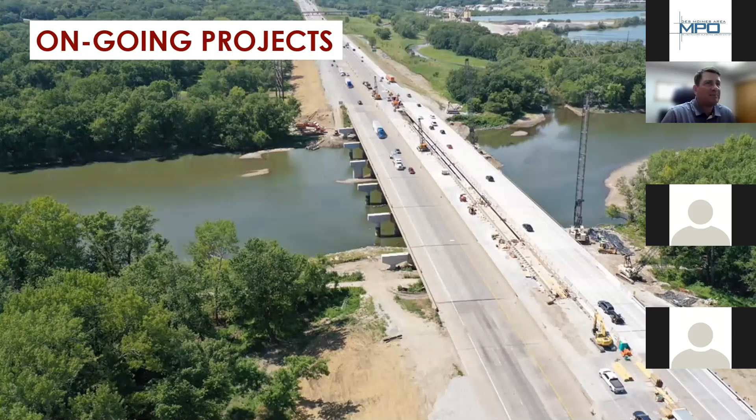So I'd like to talk about our ongoing projects. A couple of these are almost finished up, and you guys have probably been driving them for some time. But here is the Urbandale area. And as promised, we got this project done and opened end of last year. I think we're still out there finishing up a few things, but it was over a $60 million project, or about $90 million project when you include the 100th Street interchange as well. So we've, I think, greatly improved the flow out there. I haven't heard many negative comments about this at all. So I think it's working pretty good, or otherwise usually I'm the one that those comments filter to help answer.

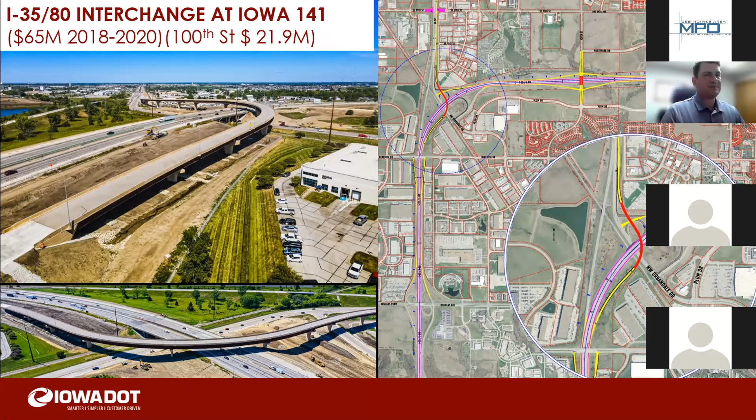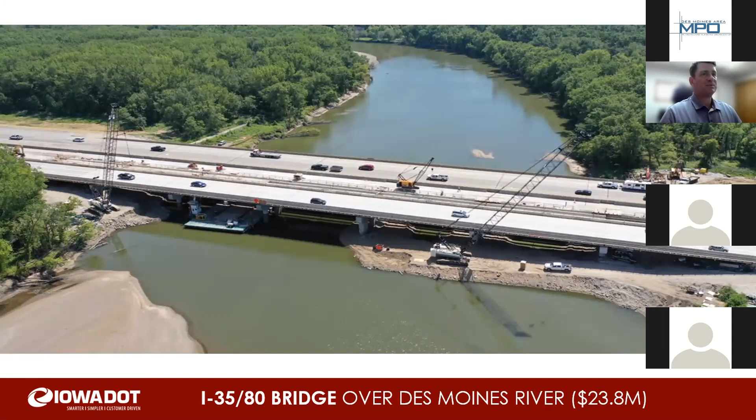So we're continuing work on the Des Moines River Bridge. The expansion of this bridge was really facilitated due to needing to repair it, and we couldn't really get it repaired safely while keeping 3 lanes of traffic open. So we ended up widening it a little bit to allow that to happen. So we're set for the future on this as well, but that should wrap up, I believe, the end of this year.

This project, First Street, I-35 in Ankeny, finished up last year. A little bit of an older picture here, but it's working pretty well out there. The only negative comment that we continue to get about this is that folks sitting at a red light don't necessarily feel comfortable or think they can turn on a red light from a one-way to a one-way.

So we've been trying to do a few social media posts and get some information out, letting people know that they can, because we don't think static signs there are gonna help a whole lot. But that's part of this improvement of flow, is that traffic can keep moving at all times through there. So if you're at a red light, waiting to turn onto a one-way, feel free to make that movement and keep traffic going.

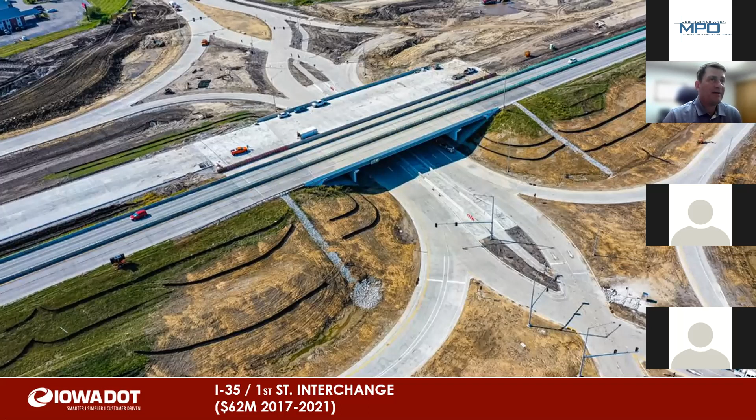And as part of this, so I back up again, but we're finishing that project up with this resurfacing here. So that will be resurfacing from south of Corporate Woods all the way to the new pavement at First Street. And hopefully this will help a little bit. We have some sound issues out in that area where we've made it a little wider and removed all of the landscaping out there. So we're going through with the new pavement and a very substantial landscaping project this year out there to help alleviate some of those concerns.

But the environmental document up front did review noise and problems. So I feel confident that we made the right choice. We just got to make sure that we have the citizens out there taken care of, because they're pretty close to the interstate in that area.

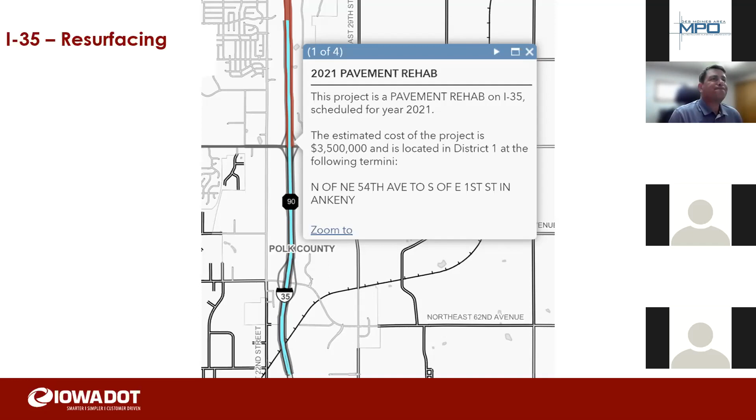This is a project just to the west of that, a few miles, that we are increasing capacity on US 69 from south city limits of Ankeny or thereabouts down to Interstate 80, 35/80. We had this project in the program 20 plus years ago. It got pulled, and took us that long to get it back in the program.

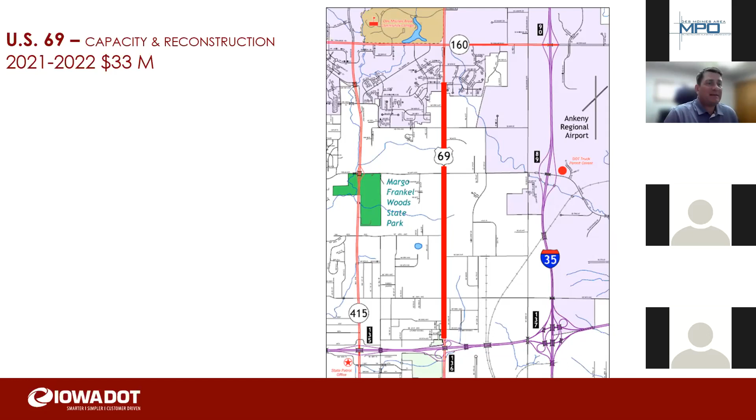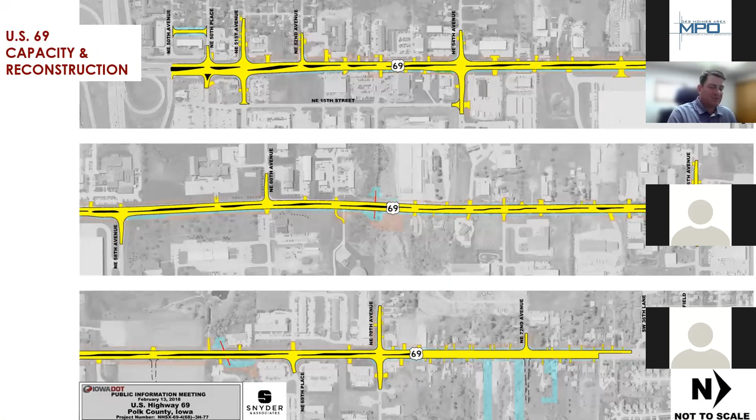But the concept here is to follow that 5-lane cross section on the north end and provide 2 through lanes and turn lanes with quite a bit of raised median in there to help with the access and control that access across there. So that's a good project. It's going on now. It's going to be going on next year. So we'll keep 2 lanes of traffic open in each direction, but there'll be some delay out there as that project continues to go.

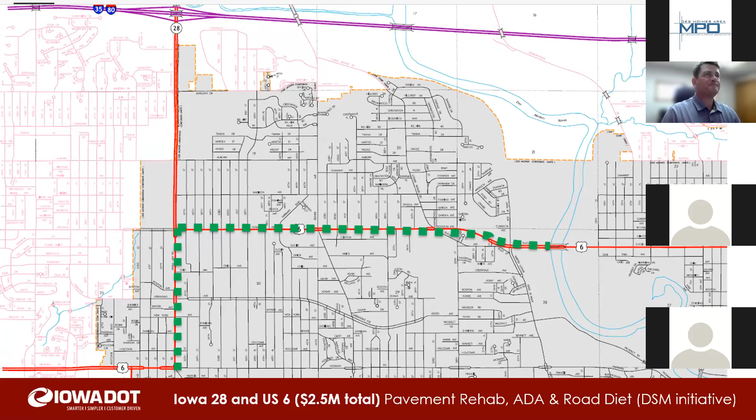We have a resurfacing project on Douglas, US 6, Iowa 28, Merle Hay Road this year. And that section on Douglas is going to be a road diet, and the city's involved with that. We've been hoping these work real well. Some areas they do, and I think it's kind of a pilot in this area, and we'll see how it goes. Those are the projects that are ongoing, that were in last year's program. I'll talk about the future projects now.

Continuing on the Northeast Mix Master, we have projects programmed there in '23 for grading and the east to north flyover bridge, and then 2027 paving, lighting, signs. So this project will take care of 2 problem movements on this interchange, one of which is the eastbound to southbound 235 ramp. It's a real short ramp, and then the Minneapolis ramp, which is a left off maneuver that's pretty old in design and definitely needs to be updated. So this is the first phase of this, kind of tackling the worst movements first.

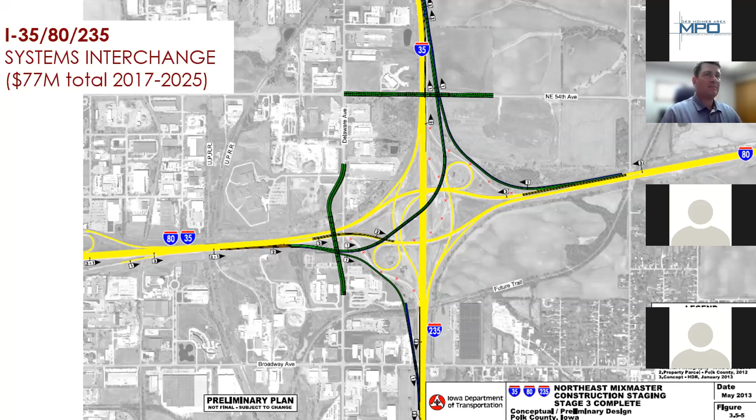And we've also had 2 phases prior to the phase that will start in '23, which were the Delaware Avenue and Northeast 54th bridges that go over, because the cross section of the new interstate ramps is going to be a lot wider, so the bridges need to be made larger. And then here's just a quick shot of the full build.

We don't have any funding beyond what I just talked about, but we have a design for the whole mix master, basically to remove all the loop ramps and create flyovers except the northbound 235 to 35/80 westbound. That movement is pretty minimal, and we thought that was the only one where the loop ramp would stay.

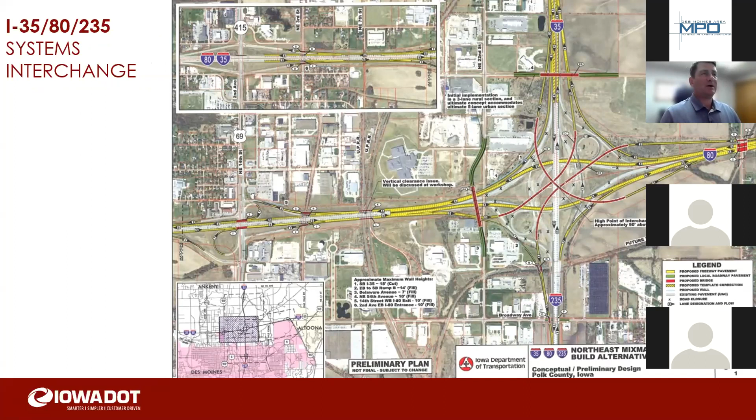Here's a project that popped up out of our integrated corridor management project that has been ongoing for a couple years, but a reoccurring bottleneck in this area was really fleshed out to the fact that this exit ramp from I-80 to southbound 65 bypass needed to be extended. So we put a project in for 2022 to pave about another 1,000 feet of that exit ramp. And as you can see, the photo on the bottom shows a big backup there.

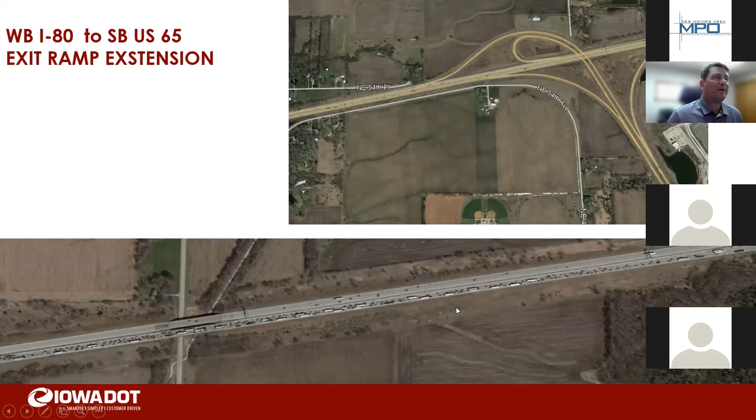This next project is helping more with this and going to add capacity in between the Mix Master and the bypass to help with that reoccurring congestion, because the extension of that ramp is just going to help kind of carry us over till we can get more capacity out here. So we have $30 million programmed in 25 and 26 for this, and those will meet in with the Northeast Mix Master, and we're coordinating those projects.

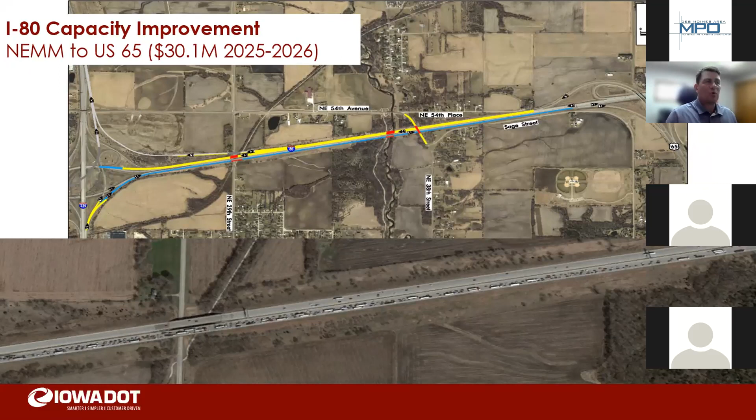We have I-35 six-laning that we have fully programmed now from 36th Street in Ankeny up just north of Iowa 210. And we have approximately $140 million programmed for that starting in 23 through 26. That's going to be a great improvement, and we're going to continue to do our best to get that improvement north of there programmed as well. But we have a lot of needs across the state, so we haven't quite made the list yet.

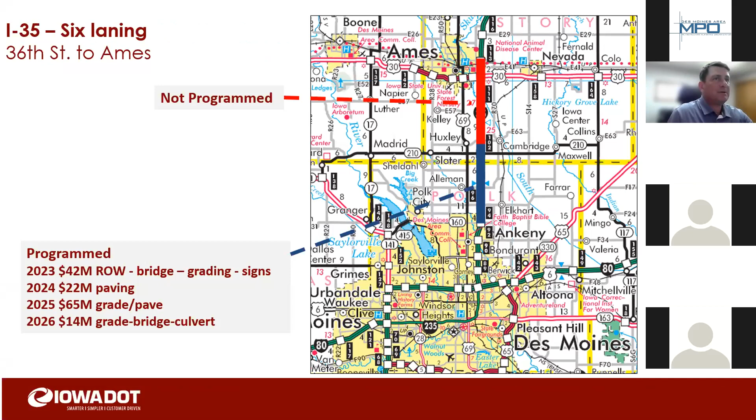Another project here that was just identified in this year's draft program was ramp metering, another project that popped up out of the integrated corridor management project / study. So we have 3.5 million programmed to start ramp metering. I'm sure this is going to be a bigger project, and I think our thought was this was going to be some kind of seed money and maybe go for a larger grant application to do some of this work.

It really showed in the integrated corridor management analysis that ramp metering would definitely help keep constant speeds on 235 as you slow folks down coming into it, especially in certain areas. So looking forward to that. We've been working through this process with the locals, really concerned to make sure that this doesn't affect local roads, and that anything that might be needed to help with any backups that might occur from this is included in the project. So we'll be working heavily with this through this process.

Then DOT has a study right now working in conjunction with the city, studying US 69 from I-80 down to the Polk County line to the south. And we have a couple projects. We have been studying this for a while. It took a little delay because our consultant budget was bad, so this consultant got put on hiatus for a year, but we're back on. We're supposed to have our first in-person public meeting on this project in September.

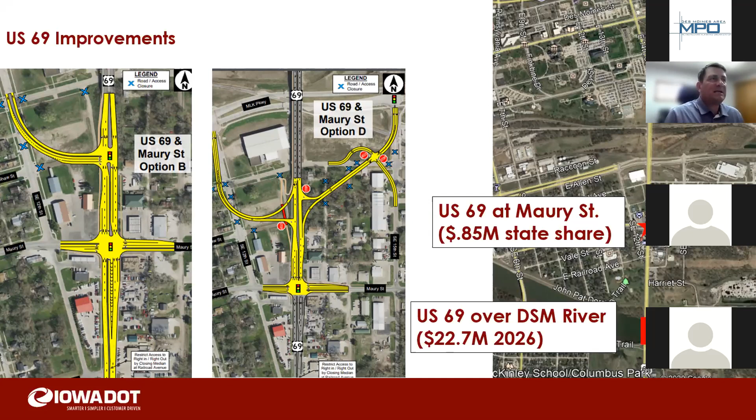And there were 4 concepts at Maury Street. A couple of them I have shown here, with different connections to ML King, not necessarily at Maury Street. I think one of them actually did connect with Maury, but definitely improvements, turn lanes and signal improvements at Maury and things of that nature as well. So more to come on this, but we have some money in there to work with the city and come up with the idea of what we want to build there.

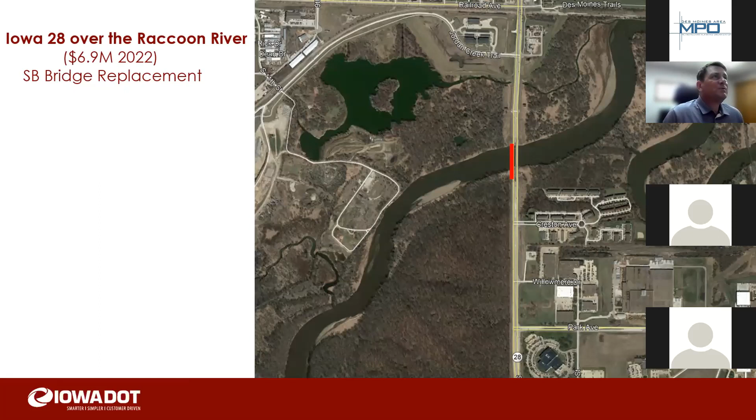Iowa 28 over the Raccoon River, 63rd Street, we are replacing the southbound bridge, and that will include trail accommodation along there. So that'll be nice. We did work to make sure we had that, kind of in the efforts of complete streets, and we're not going to be back out here in a while. So we kind of worked and pushed to make sure we made that happen. That's a 2022 project at about $7 million.

We just received, I believe, the last in 2026, last program dollars we think we'll be needing for the US 6 Hickman Road interchange at 35/80. IJR has been completed and approved by Federal Highway Administration. Just need to get out with the final public meeting and work through project development on this.

We think the divergent diamond has been working great, and this will really help speed up this intersection. I'm sure everyone's driven through there and knows that at certain times you probably don't want to be out there.

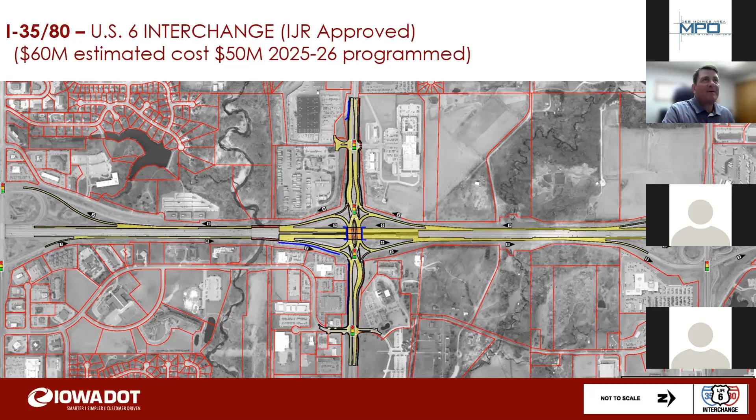Move up a little north of that area on 141 at 121st Street. Had a project to close off 121st Street to the north, make some turn lane improvements there at that intersection. Now it'll be a three-legged intersection, and then create a new roadway to the north off of 415. We've had some close calls out there and a few fatalities. I don't think we've had any in the last 5 years.

I think they were a little bit beyond that, but we've put a couple of warning systems out there, and those seem to be working, but we think we need a long-term solution as this area continues to grow and traffic doesn't slow down in these areas.

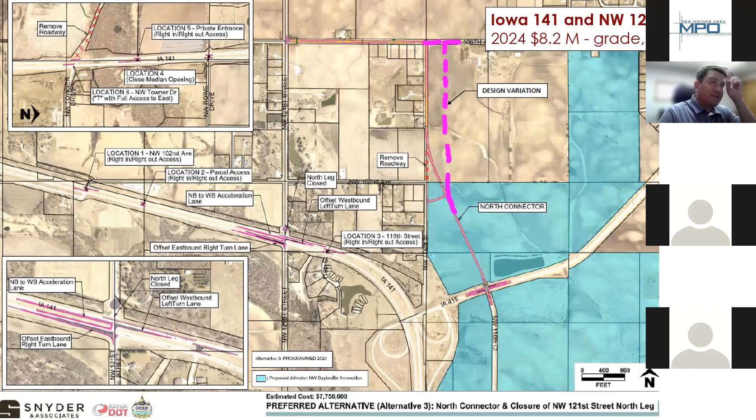Another bottleneck removal here, which will tie into the next project that I talk about, but the Omaha Ramp from 35 southbound over to 80 westbound coincides with the 235 traffic in a bad way. And what happens there, we've learned in the ICM, is that the majority of the traffic from 235 westbound wants to get to Jordan Creek Parkway. So what we're going to do is add auxiliary lanes in there to help that merge happen.

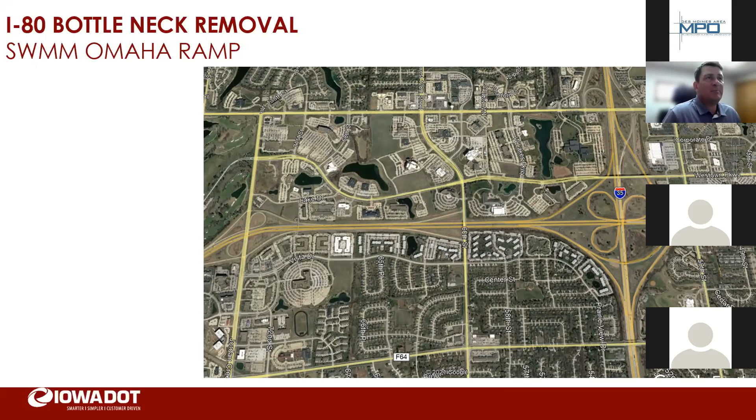And I'll talk a little more about that on my last slide, which is the Southwest Mix Master, but we're trying to accommodate some of that in the future design of any improvements to the Mix Master interchange there as well. This project here is a capacity improvement from Jordan Creek Parkway out to Grand Prairie Parkway.

And the auxiliary lane will tie in with this project like I had talked about. So having that westbound auxiliary lane from the Omaha Ramp and an additional lane all the way out to Grand Prairie Parkway in this area. This will be a 3-year project, 23, 24, and 25. Kind of build in place as much as we can without buying right-of-way.

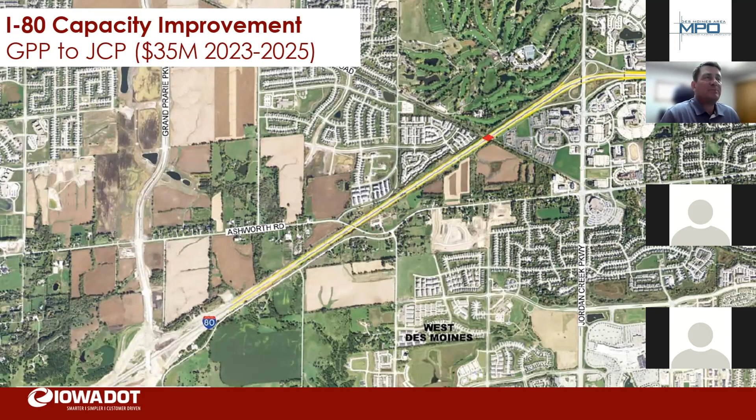And then this is our unfunded project here that I added in at the end. We've just finished up a location study on this, went through numerous alternatives and have sent that out to the locals for their review and comment, and trying to work forward. We knew we needed to get to a point with this systems interchange like we were on the north side of town. So here we're starting that process. Really we wanted to create something that was going to be phased and where you didn't have to rebuild the whole interchange to get rid of the worst movements.

So as you can kind of see here, can you guys see my cursor or no? I don't know if anyone can see that. Yeah, we can.

Okay, cool. So here's that movement I was talking about where we're actually looking to switch 235 and the Omaha Ramp, so that merge problem is vastly diminished or gone. So just one idea, and there's a few alternatives in the report, and we had a second consultant on board to review the work and critique it, kind of a value engineering, if you will. So we're pretty excited about this. Obviously, we don't have any funding for it, but we'll be working towards that in the future.

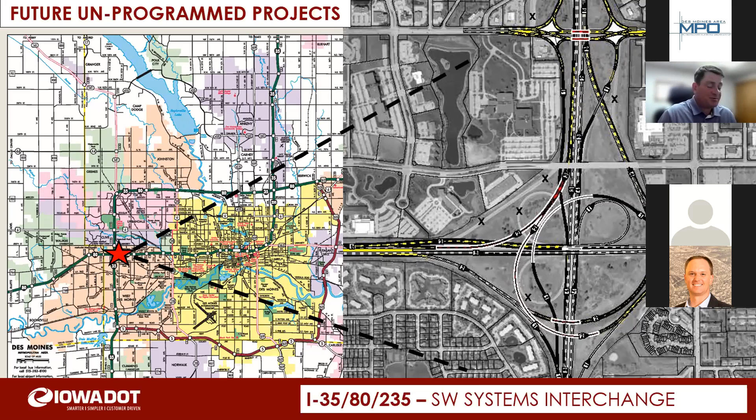That's all the projects that I have talked about. We have a few smaller ones in there, but I didn't bring in the small culvert replacements or some grading work or things like that. So if you guys have any questions, feel free to ask, or if not, we can move on with the agenda. All right, thanks, Andy. Any questions for Andy?